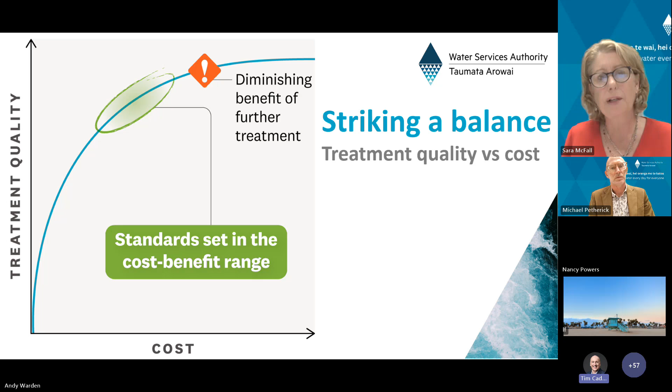So this slide, I won't dwell on too much, but it's something we'd like to hear more about. We are trying really hard to hit a sweet spot where we are balancing improving treatment quality and setting limits that will improve environmental outcomes, as well as being affordable. So that is trying to strike that balance, as it says there. We're hoping we've done that, but that's what we're hoping the consultation will flush out. No pun intended.

So just a few things about the legislation we're working within, and legislation that's before Parliament at the moment. We already have the ability to set wastewater standards, and they can be for a number of different things. We are prioritising the four we're going to talk about today, as we think they're the most common. But in addition to those, we could also set standards for air emissions and for trade waste, and that's something we might do down the track.

Another important thing to note is that the standards will only apply to public wastewater networks, and that includes those networks on Crown land, so for instance, corrections or the Defence Force. But it doesn't apply to septic tanks or to any wastewater facilities on private land.

The standards won't be retroactive. They will only apply as consents come up for renewal. So this will be something that comes into effect over the next few years, dealing with that bow wave of consents coming up for renewal.

One of the things that's really important to us, and something we're working through really carefully - Michael and John will talk about this a bit later on - is that we have very specific treaty settlement obligations, particularly in the Waikato-Waipa catchment as well as the Whanganui catchment. We also have other treaty obligations, and we are trying to engage with as many iwi Māori as we possibly can to look at what we need to do there. We have done a series of case studies that we'll talk about later to better understand the views of mana whenua.

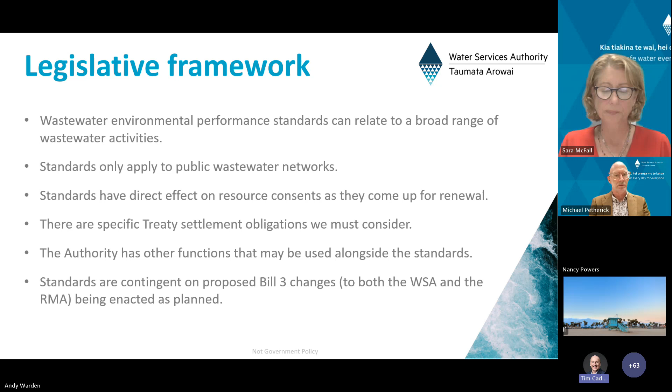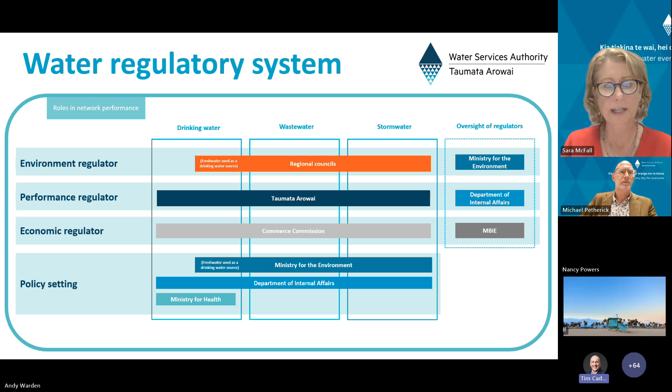So how did we get here? It's taken us a lot of work, and we've worked with a lot of people to come up with the draft standards. We started with some technical reports that we commissioned, and we looked at international best practice as well as what's happening in New Zealand.

Wastewater standards are really common overseas, so we've looked at what's been done over there. We also set up a technical review group, which we were very lucky to have some incredibly engaged people helping us, including people from territorial authorities, regional councils, our board, our Māori advisory group, and some really excellent industry experts. That group spent about 3 months working with us and provided incredible input, and we're very grateful for their time.

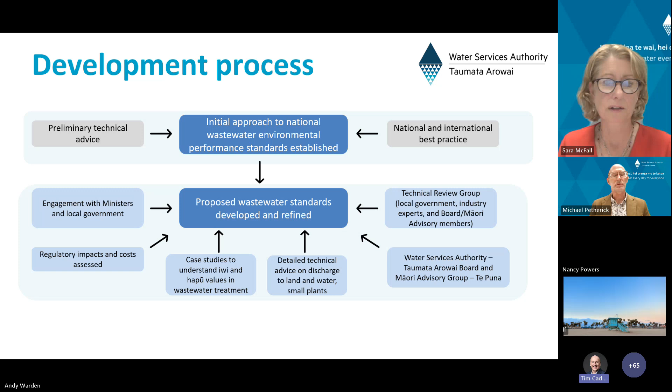We've also engaged very broadly, talked to our ministers, obviously. We've received extra technical advice, and as I mentioned before, we've done case studies. So we've brought all of that together into the drafts that we've shared, and I think we have something really robust and credible to engage the sector with.

We are now currently in an 8-week consultation process, which kicked off last week. In addition to seeking formal submissions, we're doing as much engagement as we can. We're really open to having meetings with groups if that would be useful, and we'll continue to receive technical input as we need, so that we can finalise the proposals to take back to ministers.

I am going to hand over to Michael now, who's actually going to get into the detail of what's in the standards, and then we'll do some Q&A. So thanks, over to you, Michael.

Kia ora koutou, Michael Petherick. I'm the project lead for the Wastewater Standards Work Programme.

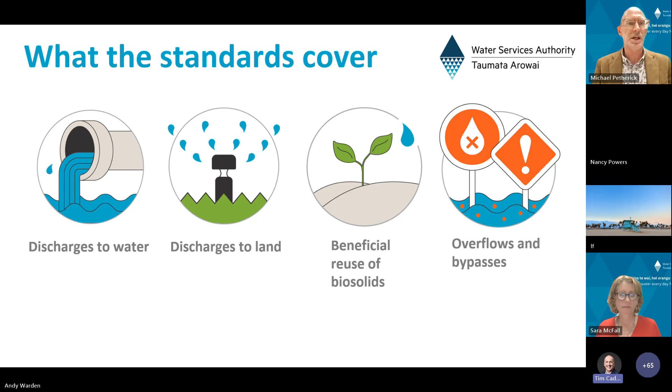So what you can see here are the 4 areas that standards will cover. You kind of need to think of these standards as being pretty much like a national environmental standard that is made under the Resource Management Act. That's the scope of the standards, that's the breadth of what they could cover, and their reach and integration into the resource management system.

So those first 2, discharges to water and discharges to land, are really focused on the plant infrastructure. Those are the main areas that you would expect to see consents being issued for treatment plants for their discharge either to water or to land.

Beneficial reuse of biosolids, that particular standard is based on some long-standing guidelines promulgated by Water New Zealand in 2002, 2003. Those guidelines were always intended to be a national environmental standard, but the Ministry for the Environment didn't get them over the line. They've been in guidelines ever since, so we are well overdue. They've been reviewed a couple of times, comprehensively once last year, and we're overdue for a standard in that area.

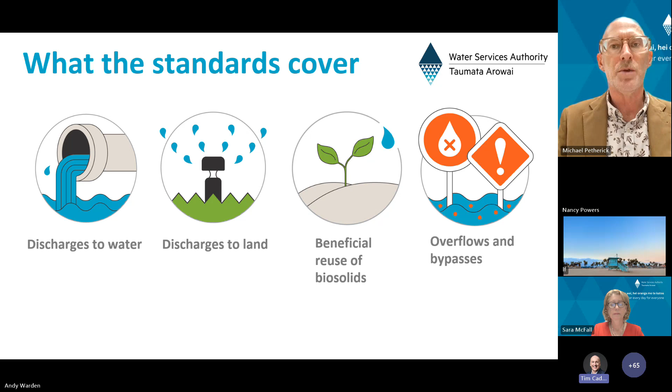And then finally, there is a proposed standard for overflows and bypasses, to bring some consistency around planning and consenting for overflows and bypasses, and a risk management framework.

So the first standard, and this is the one that most people think of when they are thinking of environmental performance standards for wastewater, is the discharge to water standard. What the standard proposes is that we categorise water bodies. There are 7 categories of water bodies, and they essentially vary based on sensitivity of the water body. So we go from open ocean, a big moving saline environment with a lot of assimilative capacity.

Then we go through to near coastal environments, then freshwater environments that decrease in dilution. You have estuaries, which are sensitive environments with a lot of people in them, and then finally you have lakes, highly sensitive freshwater environments. So we're proposing categories for those freshwater environments.

And then there are treatment requirements for key contaminants. So basically what the standard proposes is that you identify the discharge environments for your wastewater treatment plant, and then your treatment requirements are set.

Now, as mentioned before, the treatment requirements are based at a level that is intended to protect the health of communities and protect environmental outcomes. They are based on an understanding of what's in consents at the moment, and on an understanding of what our freshwater quality is like at the moment, but also set at a level that is affordable for communities, because there is no point in proposing a set of standards that communities can't afford and achieve.

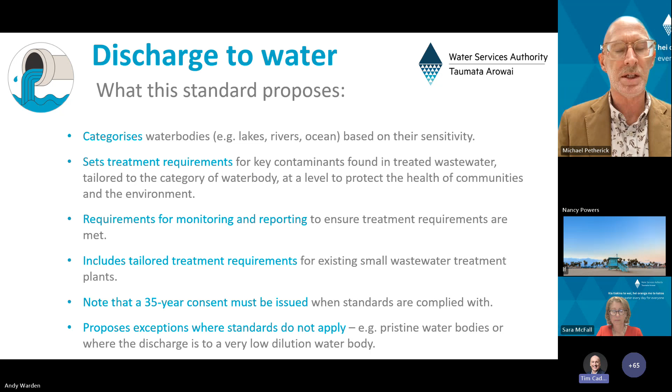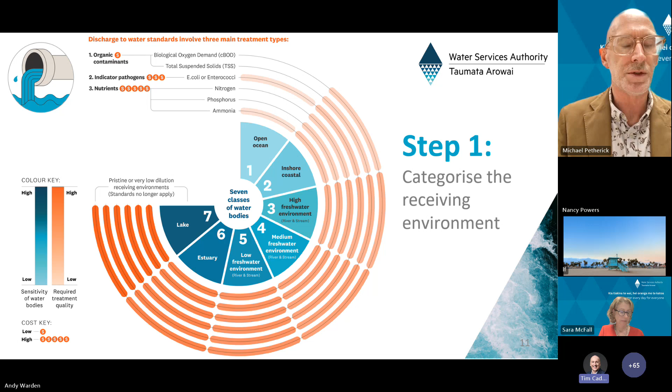Next slide, thanks. This slide is the one that engineers like those on the call, environmental scientists, and plant operators understand really well, and it makes them sit up in their chairs. If we look down the left-hand side, we can see the different contaminants proposed to have limits as part of the standard - BOD, total suspended solids, total nitrogen, total phosphorus. There is a separate standard for ammonia because it's toxic to plants and aquatic animals. And then we have a standard either for E. coli or enterococci, depending on whether you are discharging to freshwater or the ocean, so a pathogen standard. We have the measurement approach that's taken for each of those.

An annual median is proposed for those contaminants where you'd expect some variation over the course of a year, enabling the plant operator to vary plant operation based on seasonality and other factors. For ammonia, E. coli, and enterococci, the proposal is an annual 90th percentile, a much stricter approach, because breaching those requirements has significant impacts for public health or environmental outcomes.

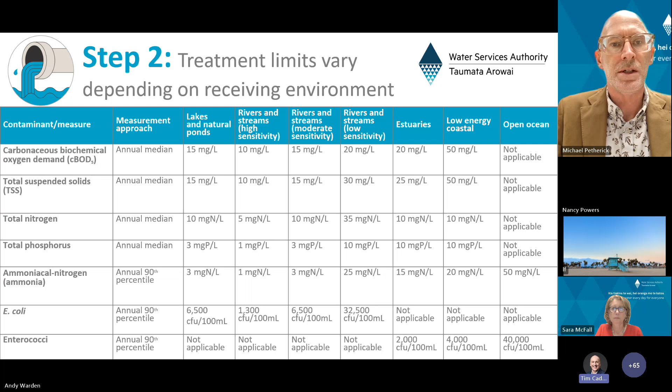As Dr. McFall said, regional councils can't require higher or lower levels of treatment in a consent. So the standards would have direct effect, going directly into a consent, and set standardized monitoring and reporting.

They only cover the most common contaminants, not heavy metals for example. Looking across all consents in the country, there are only 7 plants with consents that have limits for heavy metals - many have monitoring requirements, but only 7 have limits. 6 of those are large treatment plants serving large towns and cities, discharging to the open ocean with a high trade waste component. That's 6 out of 320 odd. So the proposal is that limits for heavy metals, if required, which is the significant exception, would continue to be set through the consenting process.

We're also proposing comprehensive guidance be developed to support implementation, so it's really clear what receiving environment you're falling into and how the standards are intended to apply. We'll also be working with the sector on sampling rates, monitoring and reporting.

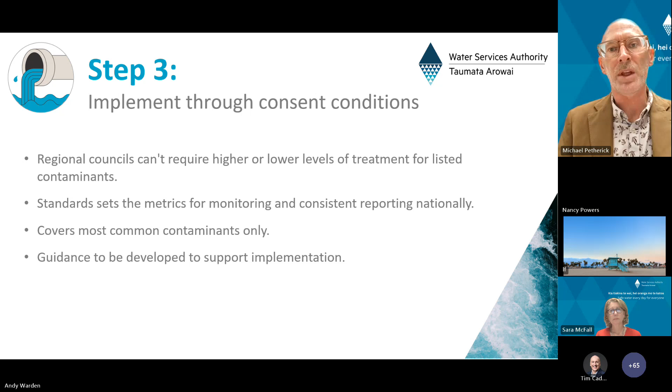The small wastewater treatment plant standards - this is intended to apply to communities of 1,000 population or less. Our experience on the drinking water regulation side is it's actually really hard to regulate using population equivalents. People move around, we have seasonal variation based on tourism, and it's actually pretty hard to just count the number of people in each house.

So to provide certainty around whether you qualify for the standard or not, it's based on an influent biological oxygen demand load - that 85 kilo a day is a mean annual load, based on what you would expect a population of about 1,000 to be delivering to their wastewater treatment plants.

So that's your qualifying criteria. The standard itself is intended to apply to existing plants. If you are going to build a new plant, or if there's significant development around a plant and the population balloons out well over 1,000 people, then you would need to upgrade to meet the general standard.

So the main proposal that's in the discussion document right now is the removal of treatment requirements for total nitrogen and total phosphorus for the small plants, those small plants that qualify.

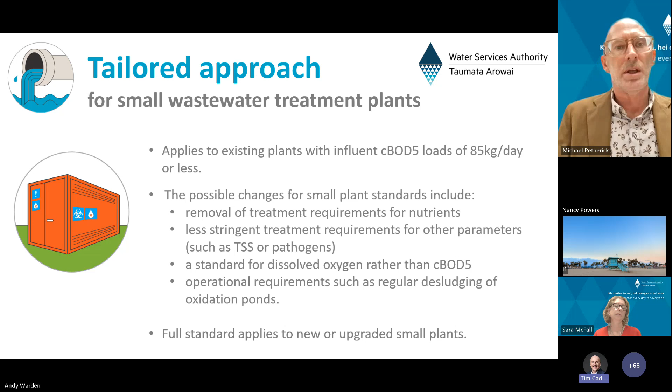Next slide, thanks. So the discharge to land standard, we'll pause for questions after this one. So this is intended to work for territorial authorities. It's designed specifically for territorial authorities to be easy to pick up and use, really practical.

And so why have we done this? Well, because half of the small plants in the country discharge to land, so it's pretty normal for those small plants. And it is something that we know communities want to discuss.

So the site-specific risk assessment, the way that it works is a council would identify the plots of land sitting around a proposed treatment plant or an existing treatment plant that might be suitable for a discharge scheme. You do a site-specific risk assessment, and that will determine is the land suitable for discharge, and what are the risks. Based on those risks, you will get a category, and that determines your treatment requirements.

So what a council can do way before it gets into the resource consenting process is identify the land that's suitable, identify the treatment requirements, and basically identify what the cost will be of the scheme, and that will not change all the way through the consenting process. That will be fixed.

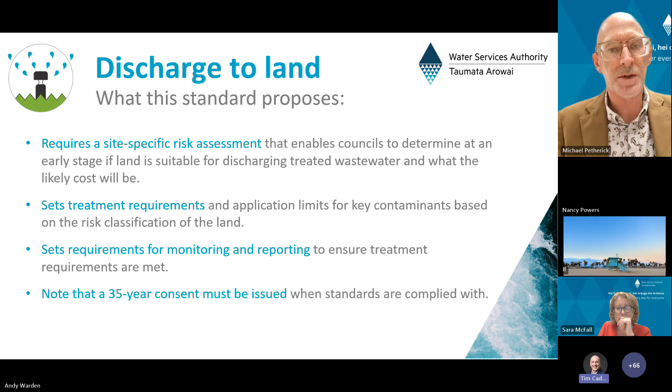And what we hope is that really unlocks discharge to land as a viable option for those councils that have suitable land around them, and particularly for the small plants, that's the main thing that determines whether you can go for discharge to land. So also consistent monitoring and reporting for the same reasons as for discharge to water, and 35-year consents.

So just quite quickly, step one, you do your baseline assessment, you determine your risks, risk category for the site, an in-depth assessment of the site, and on that basis you get a class, and the class determines your treatment requirements. So next slide, please.

So you'll see these are the treatment requirements. Now the advice that we have had is that discharge to land, the land is doing treatment. So we have nitrogen and phosphorus treatments, loading rates, and E. coli. And so beyond that, the land is actually doing the treatments.

And so we hope that this is a way of enabling a reasonably low cost approach toward discharge to land that is cost effective for those councils where it's a suitable option. For discharge to land, same rules apply as for discharge to water.

The only other thing I'll add here, right, so actually we flip back to that last slide. So Gary's on the call, so he'll want me to mention this.

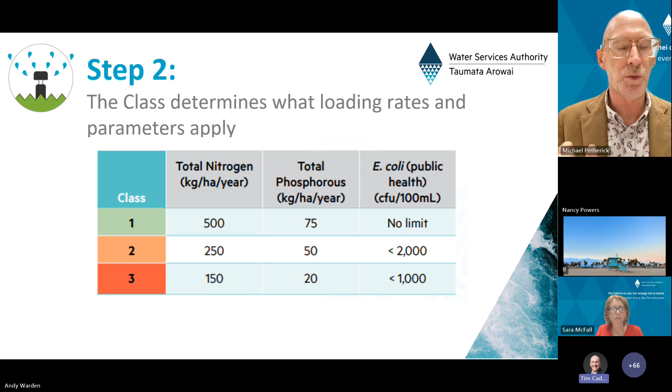Operations and management plans must be in place as required on the consents, and we will be working to develop guidance around the O&M plan as part of this. So you have these annual loading rates for your scheme, and then you are required to do things like monitor aquifers, monitor for flooding, all the things you need to do to run the scheme and respond to environmental events, set out in your O&M plan that you have to comply with. A really important part of this is making sure we are not poisoning water or land, which none of us are here for.

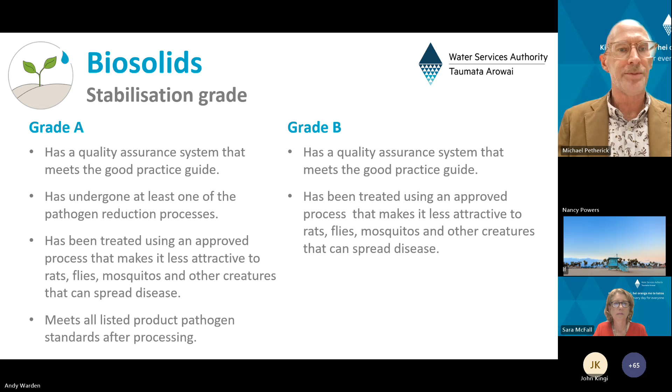It's a grading approach: you take your sludge, you process it to grade, and that leads to activity status. So the way the standard works is you have a pathogen grade and a contaminant grade. If you meet the pathogen and contaminant grade, you're A1 — fantastic — and application of the biosolids to land is a permitted activity.

If you meet the contaminants grade but not the pathogen grade, it's a controlled activity, and there would be things like withholding periods in the consent. If you aren't meeting either, then it's a restricted discretionary activity — not a definite no, but subject to much more rigorous control under the consent. Also, as part of the biosolids proposal, if you're applying biosolids to land in significant quantities, there's a nitrogen loading requirement, which is pretty much what you'd expect to see with any fertilizer.

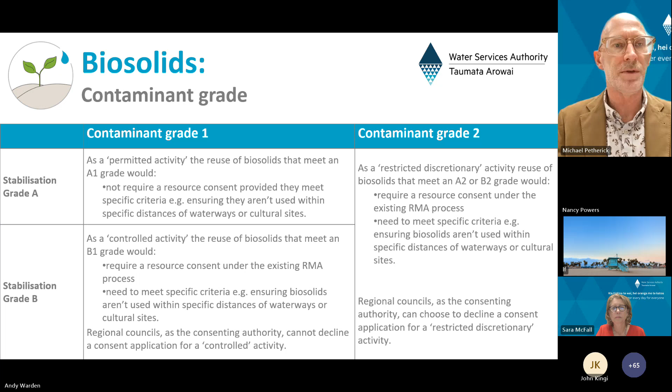Overflows and bypasses. This is an audience that will understand this really, really well. Networks overflow — they're designed to overflow, they're old, they overflow really, really regularly. This is pretty much all networks, right? Bypasses of plants — most plants will have a bypass arrangement, and they're used when it rains heavily and the network is overwhelmed, to protect the plants.

So half of the regions in the country are prohibiting overflows, and half are controlling them through consents in some way. The result, with good intention — the intention being to reduce the frequency of overflows — is that it's actually driving monitoring and reporting underground. That means the regulatory system is disincentivizing councils from monitoring and reporting the overflows that are happening, understanding that network, and directing their investments in a cost-effective way at those areas of the network that require it most.

So that is not a good situation. For bypasses of treatment plants. A lot of those are being treated as emergency activities, so they don't have a consent. So again, there's not monitoring, there's not transparent reporting around the bypasses.

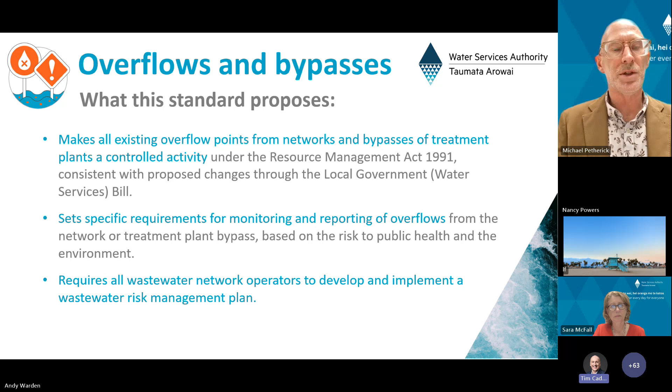Monitoring and reporting requirements for overflows will be based on risk. That's a really important part of the proposal here, based on risk. We're really worried about the high risk overflows in particular. And then finally, a different tool in our legislation, the risk management plan, is an overlay to ensure there's comprehensive risk management.

Next slide, thanks. So telemetric monitoring required at all engineered overflow points that are classified as high risk, all new overflow points, all pump stations, all uncontrolled overflow points where they're happening regularly - that's places where they shouldn't.

And so reporting across the risk categories is separated out into first response. You have to tell your community for the high risk ones immediately. You have to tell the regional council, public health immediately, and then follow-up reporting: this is why it happens, this is what's going on, this is what we're going to do to ensure that it happens less regularly in future.

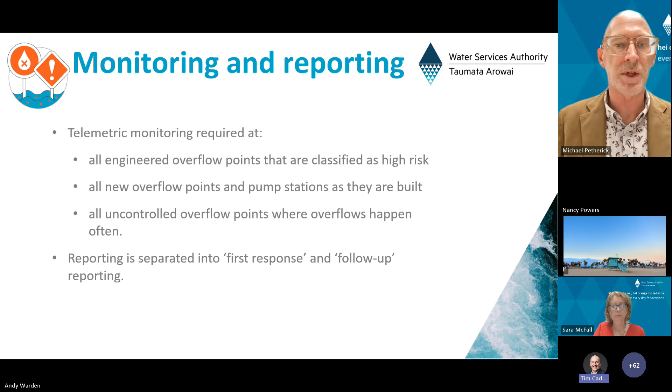So we have worked pretty hard as part of the standards work program to simplify the existing processes. Really important to simplify existing resource management processes - they are expensive, they take a lot of time. So by and large, what is proposed here is pretty similar to what the existing process is, but there are definitely efficiencies.

Stage 1, so nothing in the Local Government Act changes as part of these proposals. So territorial authorities still need to be engaging with their communities about the preferred treatment option. So if you've got options that might be, okay, we want to move that treatment plant from a wahi tapu, move it to a place that's more acceptable, or we want to move that discharge point from the estuary to open ocean, we want to consolidate 3 plants into 1 plant.

We want to move discharge to water. We want to move it to land and keep that existing oxidation pond as a kind of primary treatment. So those conversations all happen with the communities.

Once - what the standards will do is they will set the treatment requirements. So when you're talking to those communities, you will be able to say exactly this is what your option is, this is pretty much what it's going to cost you. You will move from 300 options, we hope, down to like 10 or 15 options. And that is a really big plus for a standards-based regime that we've seen internationally.

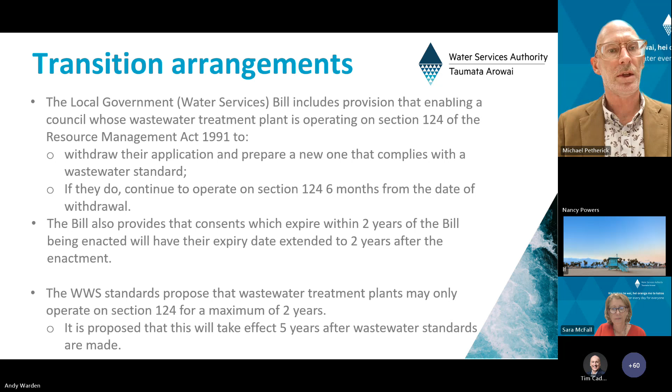Iwi and Hapu engagement. John Kingi is on the call and will speak to these slides. Kia ora John. Kia ora Michael. Tēnā kia koutou, ko John Kingi tēnei. I'm a chief advisor working in the iwi and hapu engagement and treaty space.

Our engagement approach has focused across a number of identified groups. We've undertaken targeted engagement regarding our direct treaty settlement obligations, including specific obligations in the Waikato Waipa and Whanganui River catchments. We've also undertaken broader engagement through online webinars, which are ongoing and starting up again next week. You would also have seen in the material supporting the proposals some case studies where we've sought to understand iwi and hapu views on wastewater consenting arrangements across 6 different treatment plants.

We've also sought additional technical advice through the technical reference group and our Māori advisory group, Te Puna, and we're continuing to identify additional engagements through the public consultation phase. If you're aware of particular water bodies or obligations in your areas that you think we need to be cognizant of, we would welcome those being provided to us.